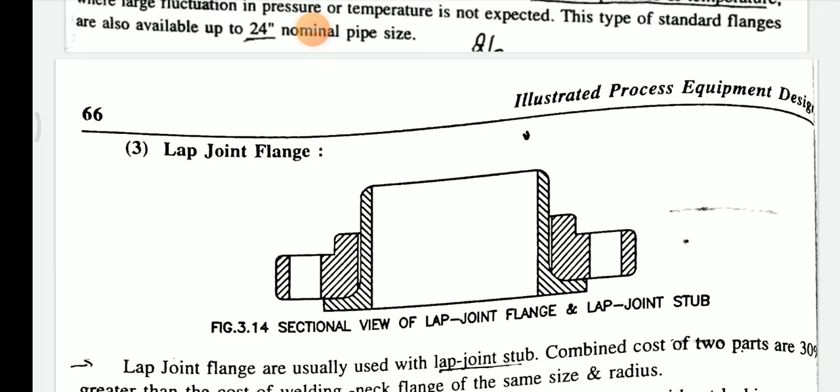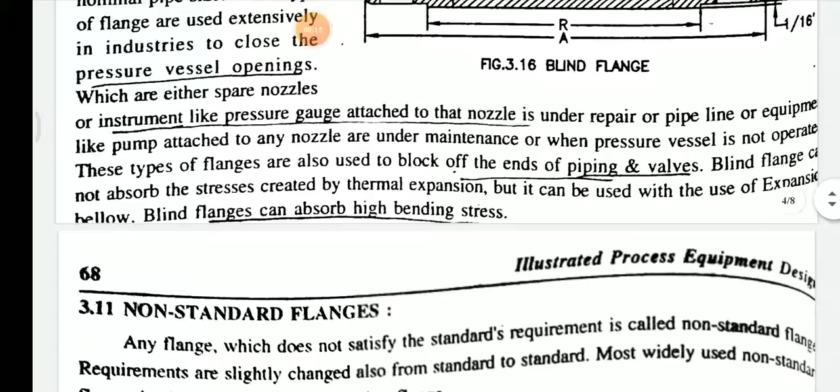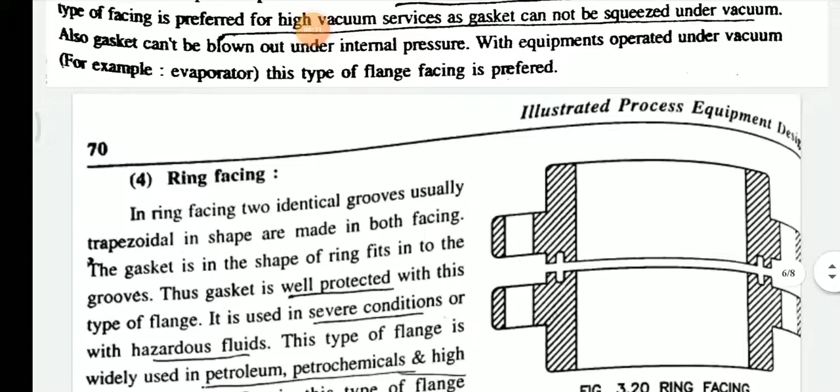Flange facing. Now, between any flanges, a flange facing position is required. So in flange facing positions, there are a number of gaskets available for the prevention of liquid leakage during the flow in a pipe.

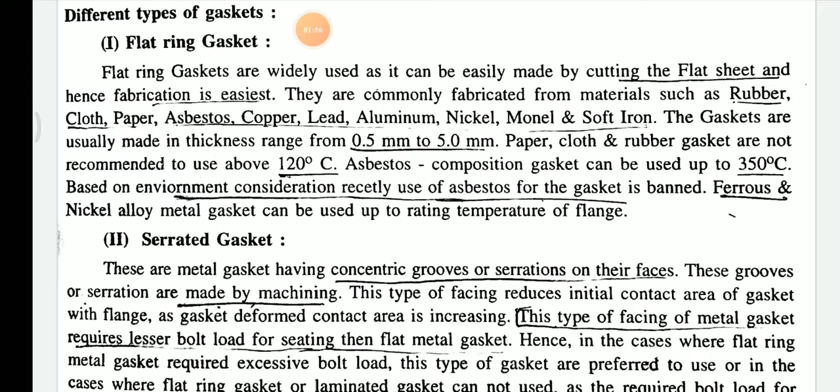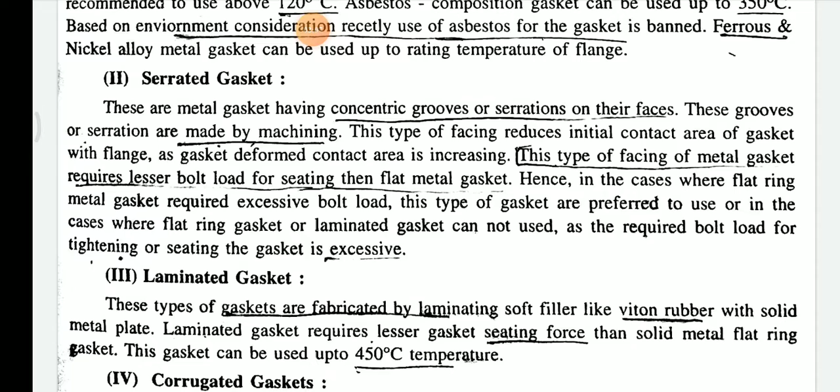Next is the serrated gasket. So serrated gasket, all these types of gasket are used for different purposes. Like the serrated gasket, you can also google for the picture of a serrated gasket. This type of gasket looks like a spiral wound type of gasket. These are metal gaskets having concentric grooves or serrations on their faces.

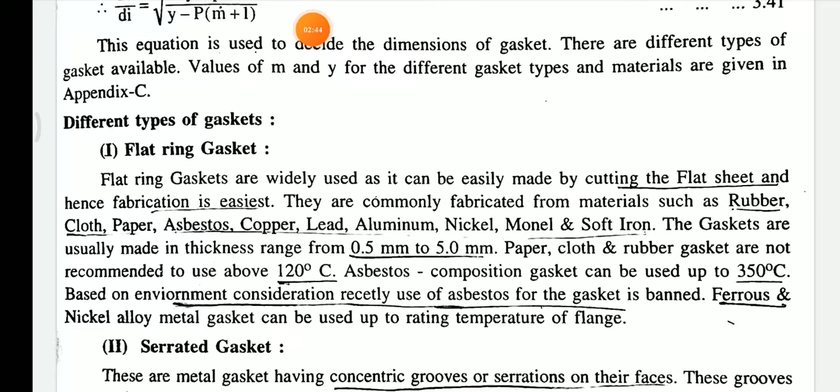Okay, so first of all the serrated gasket is made from metal and their faces have concentric grooves or serrations. The grooves or serrations are made by machining.

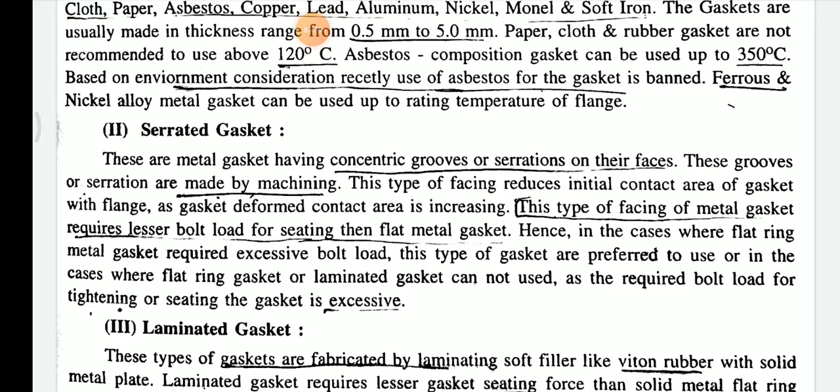These types of facing of metal gasket require lesser bolt load for seating than a flat metal gasket. Compared to the flat ring gasket, it requires a lower bolt load on the flange facing. So in cases where the flat ring metal gasket requires excessive bolt load,

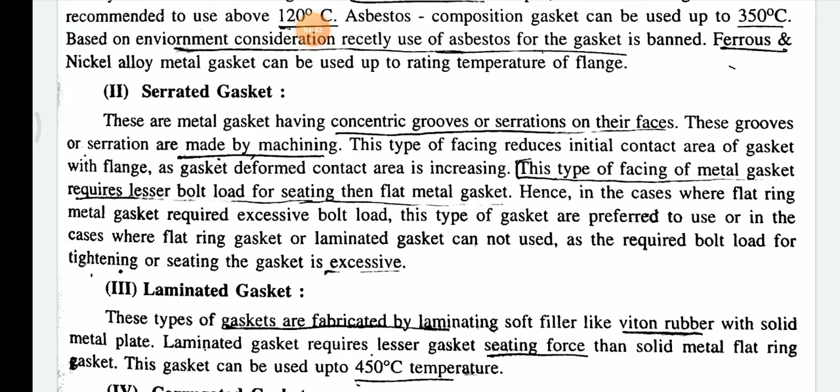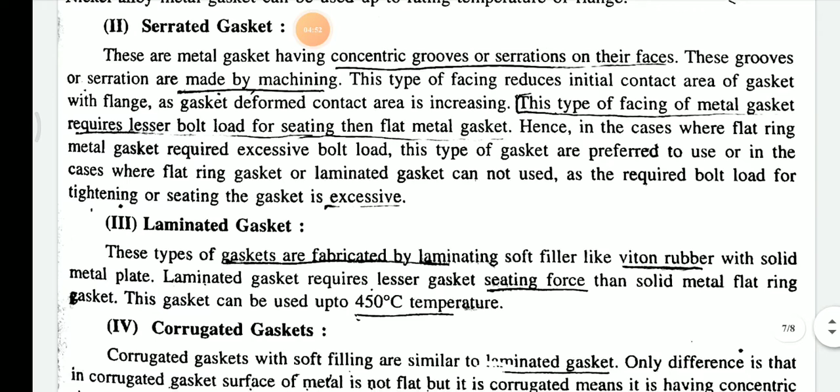These types of gasket are preferred in cases where flat ring gasket or laminated gasket cannot be used, as the required bolt load for seating the gasket is excessive. This type of serrated gasket is used where the temperature is above 120 degrees Celsius and also where the laminated gasket is not used. So in both cases these types of gasket can be used.

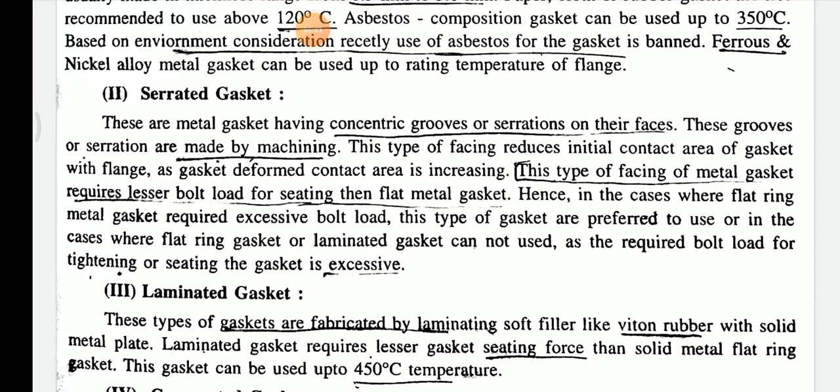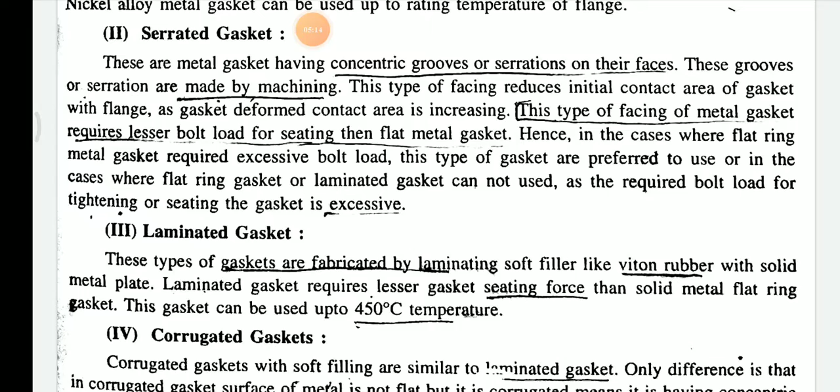And the required bolt load for the tightening of the two flange facings with the gasket is very excessive. The third type is the laminated gasket. These types of gasket are fabricated by laminating a soft filler like viton rubber.

So these types of laminated gasket is like that.

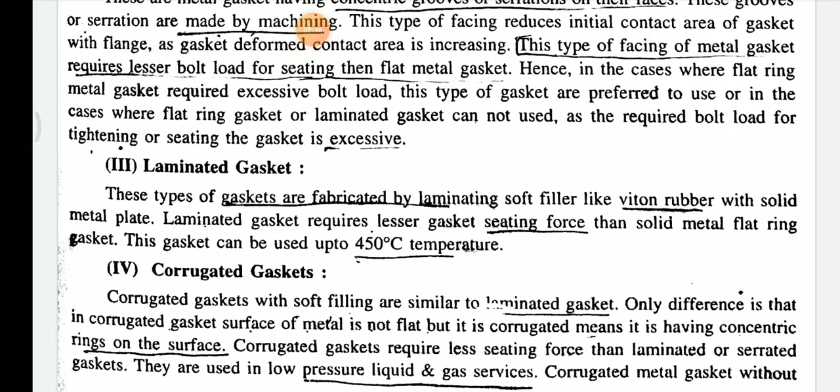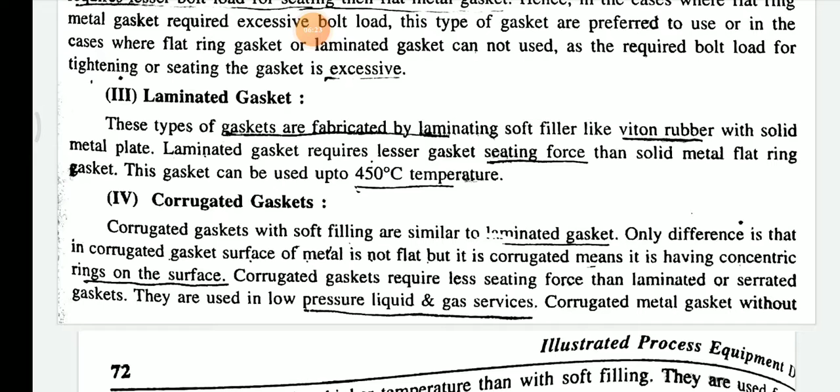Okay, the seating force between two faces is low compared to a solid metal flat ring gasket, and this gasket can be used up to 450 degrees Celsius temperature. The temperature range should be more compared to flat and serrated, because the temperature range is 450 degrees Celsius.

Then the fourth one is corrugated gasket. Corrugated gaskets with soft filling are similar to the laminated gasket. This one is similar compared to laminated. The only difference is that the corrugated gasket surface of metal is not flat, but it is corrugated, meaning it has concentric rings on the surface.

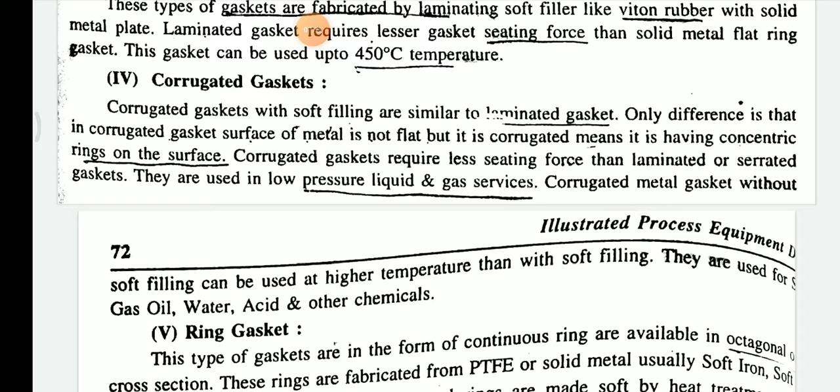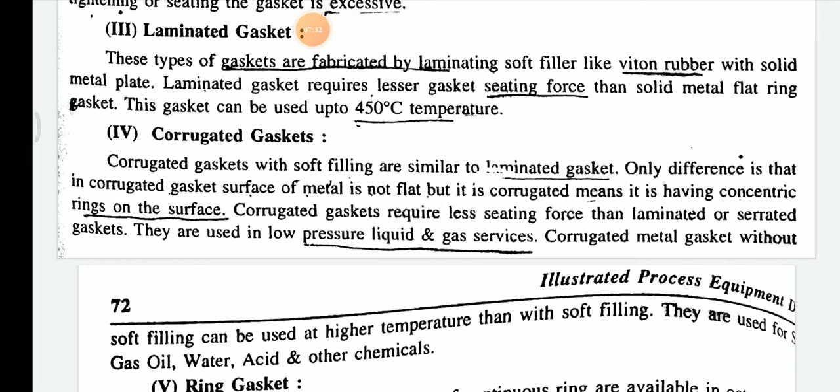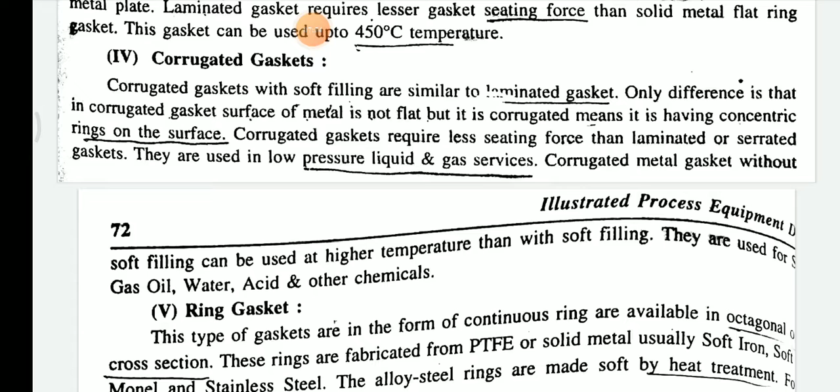Rings are there. So this is the difference between laminated and corrugated. Also, corrugated gasket requires less seating force than the laminated or serrated gasket. They are used in low pressure services like low pressure gases and liquids. In low pressure services, the flow of the liquid or the gases should be low.

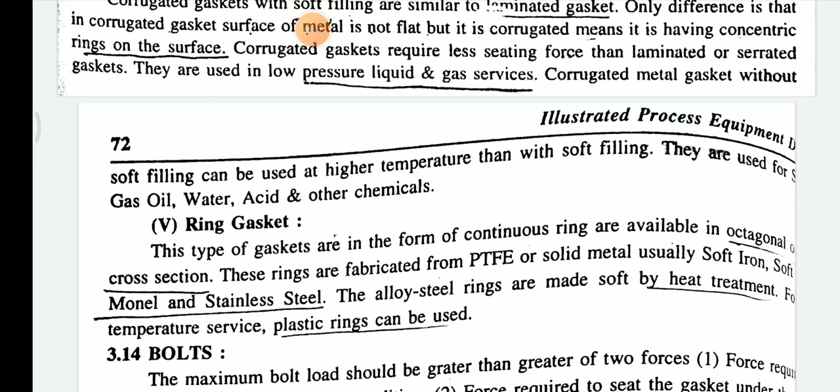Corrugated metal gasket without soft filling can be used at higher temperature than with a soft filling. So a corrugated metal gasket without any filling of soft material is used for high temperature ranges. They are used for gas, oil, water, acid and other chemicals. And the fifth one is ring gasket.

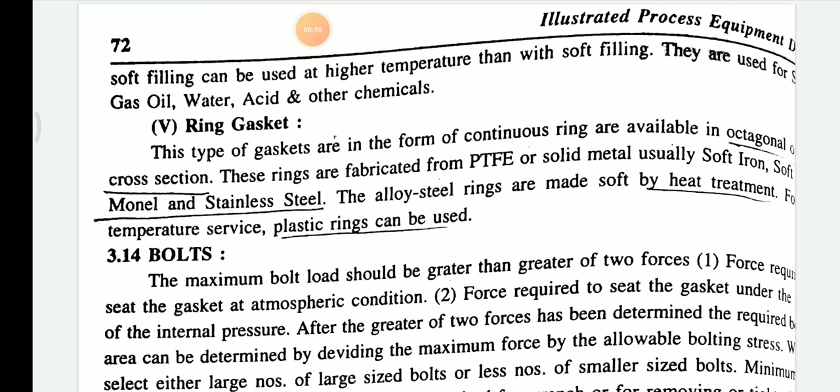These types of gasket are in the form of a continuous ring, available in octagonal or oval cross section, and these types are fabricated from PTFE or a solid metal usually soft iron, Monel and stainless steel. The alloy steel rings are also made with heat treatment, and they can be used for high temperature services.

Now the next point is the nozzle. So what is a nozzle, where it is used, what are the types of nozzle, and what is the application of the nozzle. Nozzles or openings are provided in a pressure vessel to facilitate input and output of the material. So this one is simple.

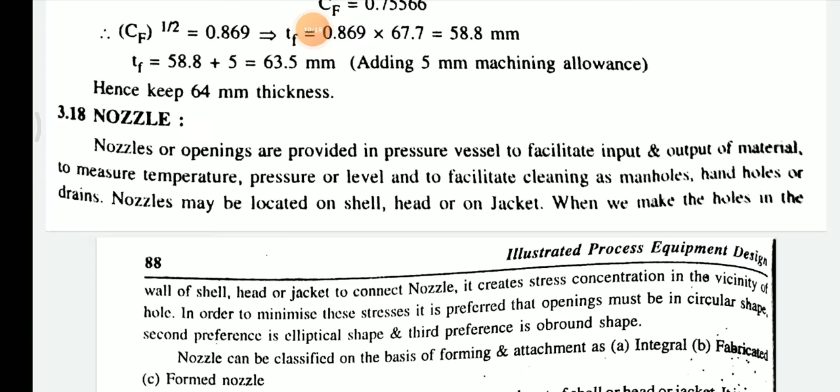Nozzles are also used to measure temperature, pressure or level, and to facilitate cleaning as manholes, handholes or drains. They are used for the measurement of temperature, pressure and level, for cleaning purposes, manholes and handholes, or we can say the drain. And the nozzle may be located on the shell, head or jacket.

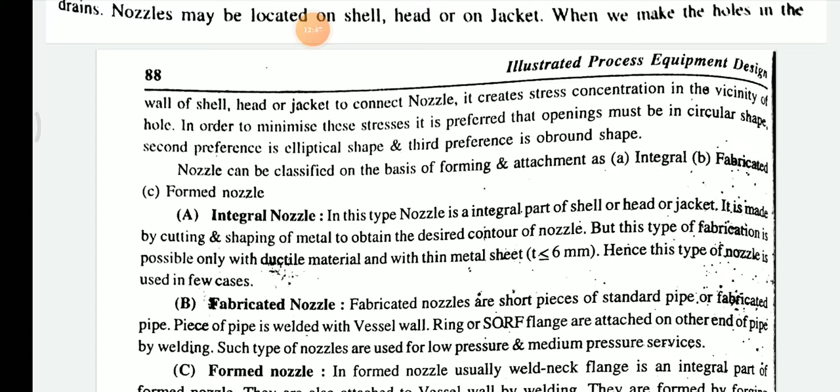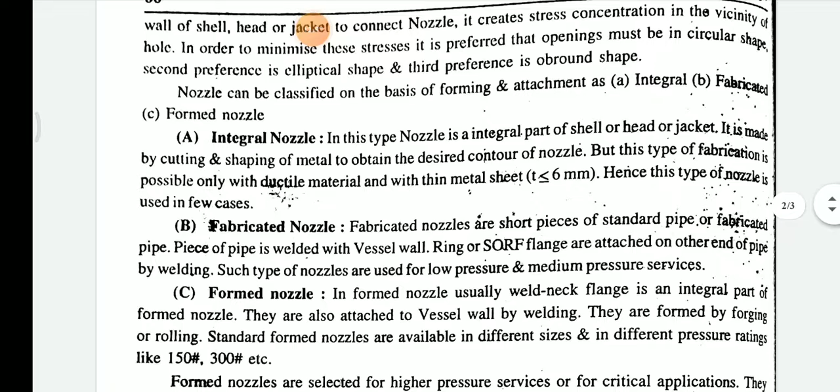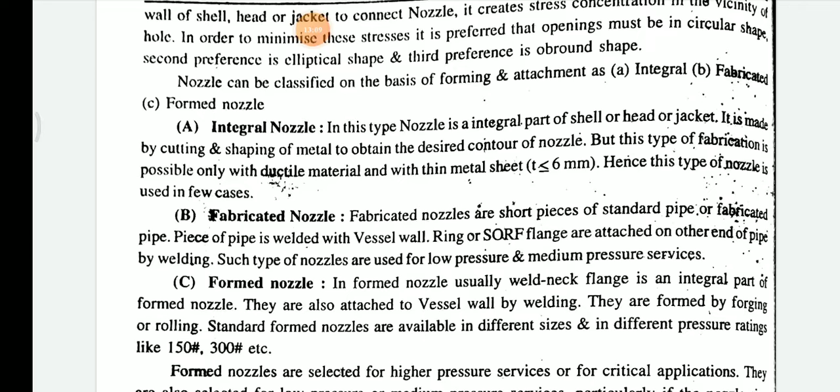It is made by cutting and shaping of metal to obtain the desired contour of the nozzle. But this type of fabrication is possible only with ductile material and thin metal sheets. So this type of nozzle is used in few cases, because integral nozzle is required only where thickness should be less than or equal to 6mm.

Second one is fabricated nozzle. Fabricated nozzles are a short piece of standard pipe, of short length, which is fabricated with something.

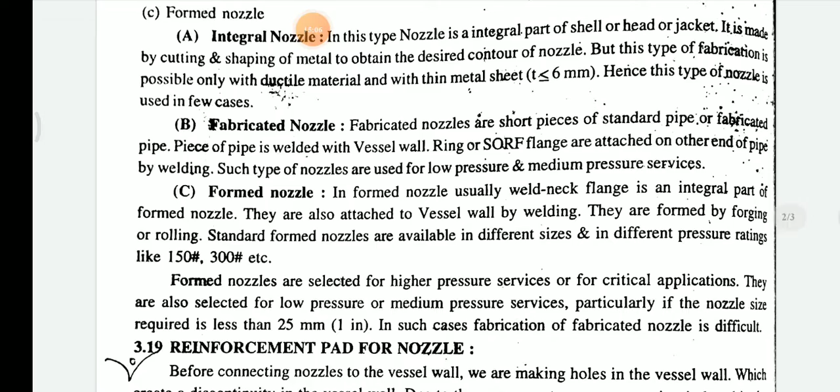They are also attached to the vessel wall by welding, or you can separately weld it to the vessel wall. And they are formed by the process of forging or rolling.

Standard formed nozzles are available in different sizes, with different pressure ratings such as 150#s or 300#s.

Formed nozzles are selected for higher pressure services, as I told you, or for critical applications. Sometimes in critical application cases they can be used. They are also selected for low pressure or medium pressure services.

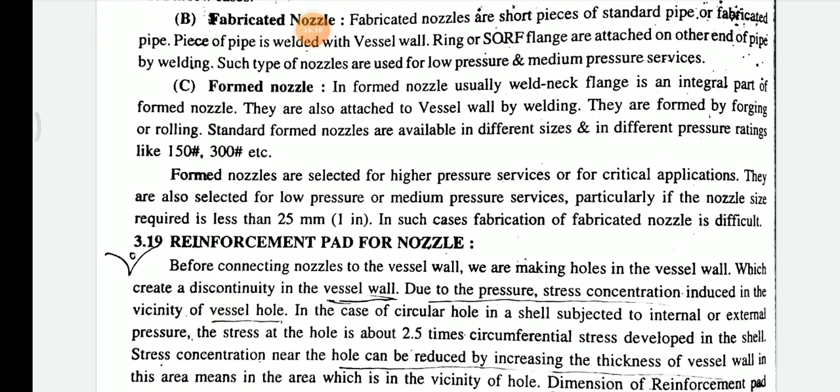Particularly, if the nozzle size required is less than 1 inch, in such case fabrication of the nozzle is difficult to construct.